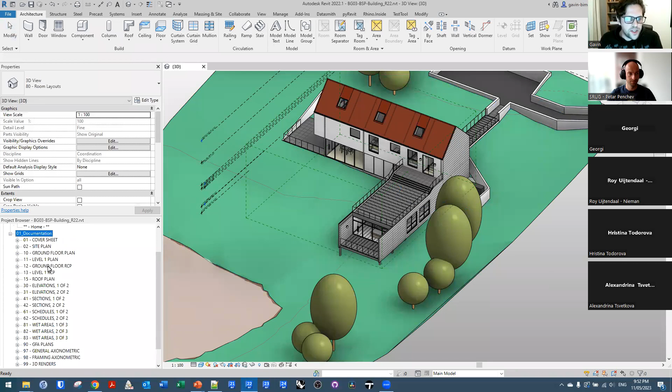So this is the model from my website. So if you want one, this is it. It's got documentation in it. It's got drawings, and it's not like the Autodesk model. It's a little bit neater. It's got some room layout sheets, and it's a bit nicer than the standard one, and it works in Enscape.

But anyway, so I'm going to open up just a Dynamo script that I've built earlier, and it's made to automate placing revisions on sheets. So if people might recognize this workflow.

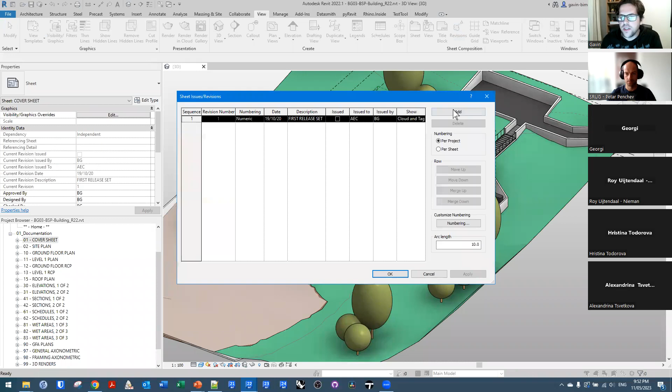Let's say you have a new revision you create. We're sending out a drawing set. We call it whatever we call it. I'm going to revision them. I'm going to go down, pick the revision, add the revision, pick the revision, add the revision. And I'm sure all of us have done that in Revit at some point.

It's really boring. It's a big waste of time. And back in the day, I used to do that for hundreds of sheets at a time. And it would take a good hour to get a sheet set ready to print. This is like 12 years ago, when Dynamo wasn't even really a thing that was available to us.

Let's automate that, because that's really boring. So this is a script that can automate that process. Now, Dynamo can be complex when you build scripts to be user-friendly.

This whole part of the script is just to build a user interface to take some inputs from the model that the user can pick from. This is using a custom package called Data Shapes, which enables you to create a form using various inputs, such as a dropdown for picking a revision, a list view for picking a set of sheets, and a combo button, or choose-an-option button, which lets us either add or remove.

Finally, we take our inputs and use them to process whether we're adding or removing revisions. It's important to note these are custom nodes. You'll notice this script is mostly using custom nodes, because at a certain point in Dynamo, you'll find there are things you need Dynamo to do that by default, it doesn't come with the possibility to do unless you actually write your own code in Python or C#.

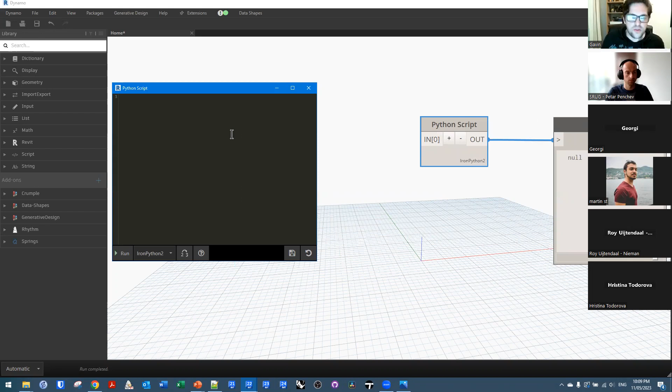We can use variables. So I can make a string, which I declare using the equals sign, and I can say string. Currently, nothing will happen in Dynamo. We have to actually send our result out to the out variable. This is quite unique to Dynamo. And I can see now I'm sending out string, and of course it's going to have a data type associated to it.

So I can check the type of it, and it's going to be, in this case, a string. I can also do numbers. So let's do an integer, being something without what we call a floating point. And we can also do a float, which in this case will have a floating point.

We can also do lists. So I can write a list. If you've ever used code blocks in Dynamo, it's the same thing. But what I can do is reference my variables and pass them forward and use them again. And then I can send out my list, and we'll see that we can store a mixture of data types through Python in a list object, which we use quite a lot.

We'll use a special type of object now. This is a range. So there are lots of constructors in Python that you learn over time. Let's make a range object, which in this case takes a few arguments, say like 1 to 5 with a step of 1. And then we'll just send that out. I can see now I've got 1, 2, 3, 4. It ignores the last integer. That's something you learn as well. Lots of things to learn in programming, just like lists start at 0 and all those sorts of things that don't make sense at first, but the more you think about them, the more sense they make.

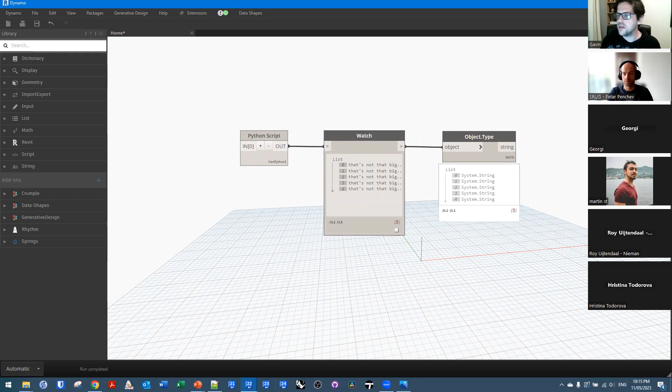I don't want to spend too long on this, but I think in this case, I must have missed one thing. Generally, there would be a way to get to a point where you catch that final outcome. I won't spend too long on it because I went way outside my example that I wrote down. So I don't have a little cheat sheet for this part, unfortunately. That's just an example of working with some statements and variables in Python. We haven't used the Revit API at all there, but we will use a little bit in pyRevit.

So let's actually get to what we're here for, pyRevit. But I wanted to lay down all those steps to get to pyRevit because that's really the process most people take to reach this point. So pyRevit, Python for Revit, it's an add-in for Revit, which allows you to access the Revit API and run Python scripts that communicate through the Revit Python shell. You can also run Dynamo scripts through it, which is quite interesting, but I generally just use Dynamo Player for those because it's still an easier method of deploying and setting inputs.

From here, you can also detect events in Revit, which is really cool. So you can run these things called hooks that trigger when certain things happen in Revit. For example, you can stop commands from happening. If someone tries to model in place, you can block it. You can say, no, we're not modeling in place today, sorry. Or you can silently just send an email to a BIM manager saying someone just tried to model in place, and you can actually start warning people when things are happening. So if anyone knows Guardian for Revit, an add-in, that's pretty much the way Guardian works. It uses events in the background, but you can do the same thing in pyRevit.

You can put it all into toolbars, which is probably the best part. Easy for users to access and see. There are heaps of tools that come with pyRevit, and one of the biggest mistakes people make with pyRevit is that they assume that's all pyRevit is, and it's like, no, this is just really the tip of the iceberg. You can build your own custom tools. Now, they're all really awesome tools, but the best part about them is they're written in a way where you can see how they were written by the author. It's all open, and you can learn from the way the author writes their tools as well.

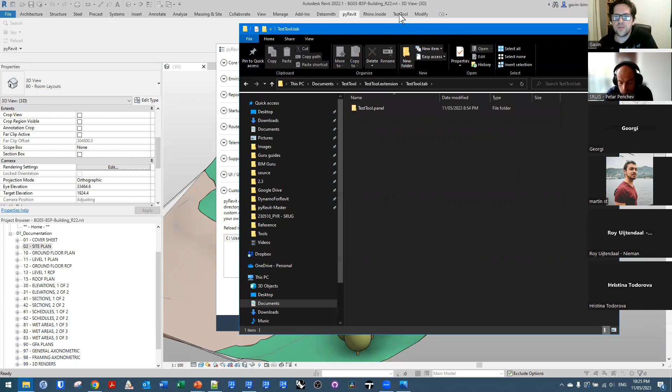And in pyRevit, under its settings, I'm currently hiding all the tools in pyRevit. I've added already a custom extension called test tool. So if I go to test tool, I can see it's just in my documents. It's got an extension folder, a tab, which is going to be test tool tab, test tool panel, which you can see is here. And then I have two buttons, currently with no icons.

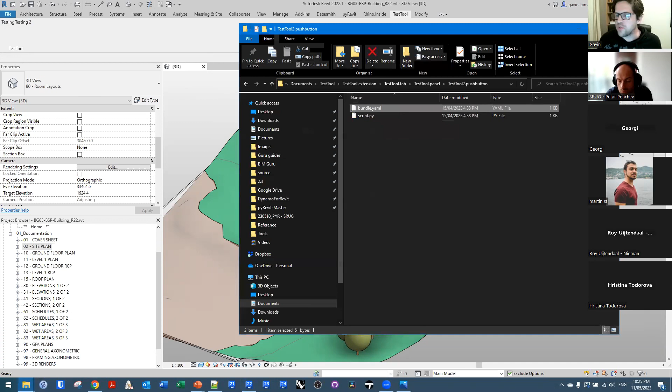And I'm just going to look at test tool 2. And we have two things. We have a bundle and we have a script. The bundle is using what's called a YAML file. It's not really a file I was familiar with before I used pyRevit. I'm not sure exactly what else YAML files are used for. I'm sure they have their use, but effectively they are just providing some settings that the script will use.

So this is why the tool is called testing 2. I've told it its title is testing 2, and I've said its tooltip is just testing. So I can hover over it and I get the properties of the YAML file. So this lets us sort of guide how our toolbar should look and display and behave. There are more complicated things we can do with it, such as changing the colors of buttons and also adding hyperlinks to help URLs that you can connect F1 help links to as well.

So we'll just leave the YAML file. Let's actually build a quick tool. So I've set up just some areas we're going to build our tool using. Most of the time when you use pyRevit, you're going to begin by importing some libraries from pyRevit. So I'm going to say from pyRevit, import Revit, which has some custom Revit commands, the Revit DB, which gives us access to the Revit API classes, script, which will allow us to stop our script, and forms.

Now, if you've never seen pyRevit, you're probably saying, how do you know those 4 things? Like, how do you even know that's how you begin a script? Well, you can look at the tools built by the author of pyRevit, but of course you can also go to the pyRevit docs. So I can look at the forms library or the script library or the Revit library. DB is a bit of a special one. It's a thing that pyRevit has built into it that basically just says, I want to talk to the Revit API.

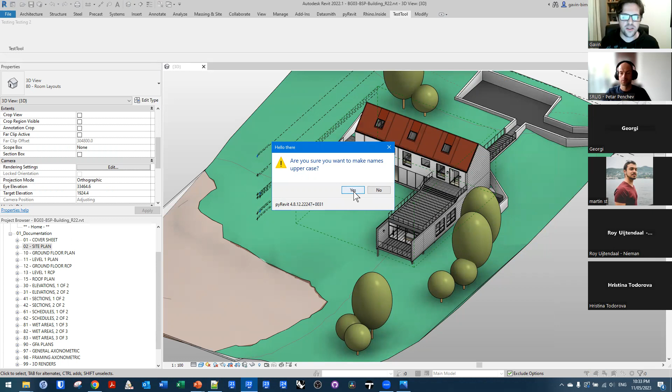If we say yes, it's going to pass the true variable to this object I've stored the form to. If not, it's going to store None, which is something that we can check for using an if statement. So I can say if not ask user, which means we rejected the form, I can just exit the script. And let's say after this point, I divide 5 by 0.

I say no, everything's fine because we didn't go past that point. So we didn't divide by 0, no error. Obviously, if we say yes, it's going to go past that point and we should get an error. And there it is, we can't divide by 0. So we can see we're able to actually control the behavior of our scripts at a particular point in the code, which is really powerful.

So creating exit conditions through code is actually really common once you start doing written code or creating alternate areas of an application to access under certain conditions. The final thing we'll do is actually create a function to actually make our sheets go upper. So we're going to make an upper name function applied to S. And maybe we'll just call this actually case change. And I'll say upper is equal to true by default. Otherwise, let's do lower.

So I'll just do a try and except just to be safe. So if something doesn't work in here, it just won't do anything. So I'll just try, in this case, to get the parameter, the sheet name in this case. So I'll do a longer method. If anyone's ever used the get parameter value by name, this is effectively what I'm going to be doing here using the Revit API. So I'm going to ask this sheet using the lookup parameter method for sheet name.

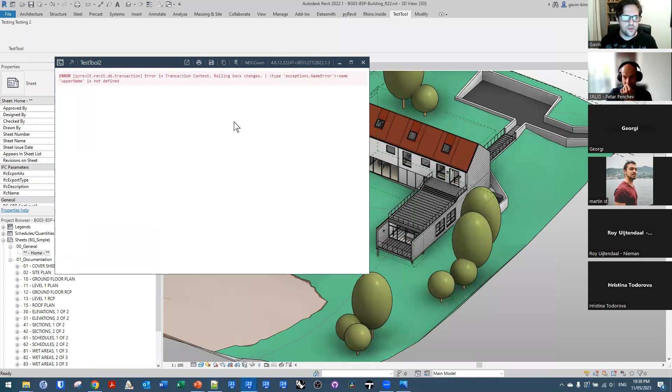I believe at this point this function should now work. You can see at the moment this home isn't uppercased. So if I run this function... are you sure you want to do it? Yes. Okay, of course, 'upper name is not defined.'

I think I need to actually use the right function name, which in this case is 'sheet change case.' Try again.

Of course, zero sheet names updated. Done something wrong here. Now I've just got to really quickly check what I've done wrong. The risk of live coding. There we go, hopefully it's just that typo. I left out a lowercase r. If not, I'll show you some working tools after.

Okay, so I'm going to sort of break a rule in programming here. I'm just going to stop using try and just see what's wrong. So I'm de-indenting in this case, and I'm just saying I assume everything in here is going to be valid. It should work, and this should actually tell me what's going wrong.

Change case is not defined, global name. So in this case, I'm still calling on case change or change case. I've called one 'case change' and one 'change case.' So it's just a variable naming issue, a very basic error, just to prove that all of us make mistakes.

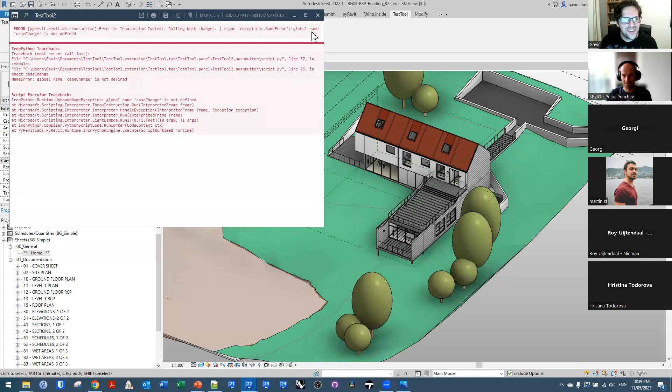I've still got one in there somewhere. Case change, change case. Someone can probably spot it at the moment. Yeah, there we go.

Okay, so now it should work. Fingers crossed. There we go, you see it worked, one sheet now updated. There we go, we got there.

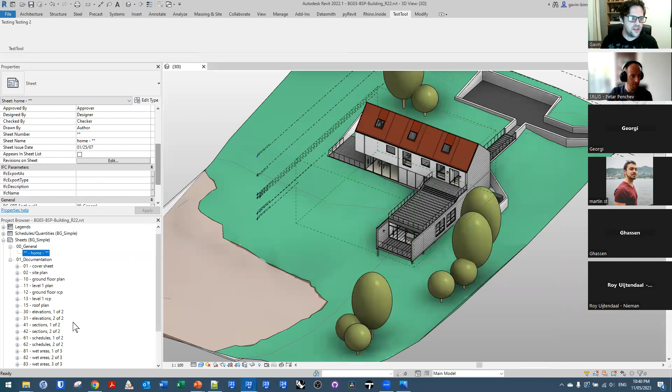We can very quickly just say, instead of that—and of course we could get the user to specify this argument—let's just say false, now we want to go to lowercase. And very quickly... whoops, that's the other one. I can run this in a different mode, and we can see that we're very quickly able to apply this in the other direction. So just a simple little tool.

I might actually show you some proper toolbars very quickly. I know we've sort of gone a little bit past the hour, but I might just show them quickly because I know that's always fun to see, and I do have permission to show these as well.

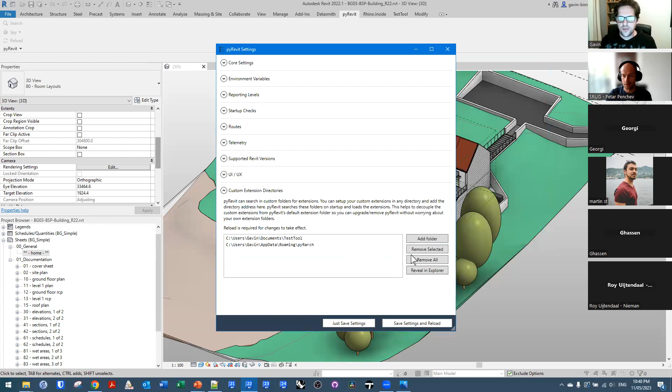So I'm going to add some more extensions here. The best place I find to store extensions is in app data, typically—it's a very accessible location. I'm just going to load up both pyRarch, which is the company toolbar that I use, and guRoo, which is my custom toolbar. So you can have multiple extensions available at once.

The more you have, obviously, the more time it's going to take to load. Some of them might start bumping into each other if they use hooks to detect the same things, so do be careful using multiple ones. Usually you need to know how they're behaving in order to use them together.

Here's the one that we use at Architectus. So buried in here are all sorts of cool tools. I can't show every single tool—some of them are very sensitive to the company—but generally there are some that I can show.

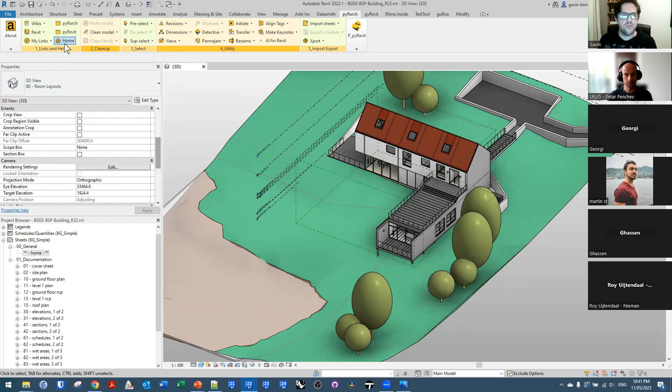For example, I built a home button for Revit that takes me home. Now, every tool I run in this toolbar is going to be just a little bit slower than usual because I have a function built into my toolbar that reports the script used to my server that we run at work, which actually gives me feedback on who's using the tools. So there's a little function that's basically hitting an error and proceeding on, causing a little lag on each tool.

Usually they're a little bit faster, but for example, we have wikis—we can access hyperlinks to websites. Most of these won't load because I'm not on the company server, of course, but they're shortcuts of people that we typically induct into the company.

I have tools such as a 'nuke' that basically goes and gets the model ready for an issue. It just tries to get rid of all the stuff we usually want to get rid of—hit the big red button, launch nuke, yes—and we just blow up the model and it's ready to go. So you can see I just automated a lot of stuff in one step there. Let's go back before the nuke.

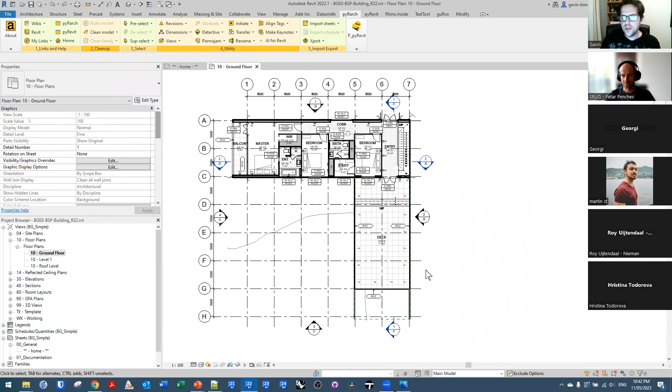As well as this, I have some really interesting tools that sort of break the rules of Revit. For example, I have a tool called pre-select. Let's say I want to get all the doors in this view. How would you usually do this? There's a few options - one is isolate category, get doors.

Another one, and a really bad way to do it, is to do a big giant marquee all over the model, filter, grab my stuff I need. Most people do that, right? That's pretty common - sweep over the model, grab the things, deselect.

If I use pre-select, I can say I only want to get particular things - maybe doors, walls, and windows. I can make a filtered selection using a special class in the Revit API that pyRevit has access to - in this case, an ISelectionFilter, if anyone knows it. I finish, and I've just formed a much faster, more efficient selection in my model.

I can do things like select title blocks on sheets. Let's say I want to get all the title blocks on these sheets. Usually I wouldn't be able to do that, but I can build a tool that goes to the sheets and selects all the title blocks. Now from those 20 sheets, I should gain access to their title blocks. There's actually 2 title blocks in one of those sheets - a custom title block. So you can see you can sort of bend the rules a little bit in Revit.

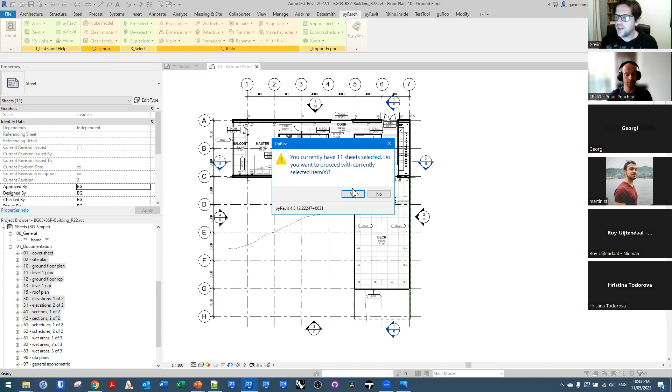But let's say we want to go and add revisions to those sheets. pyRevit actually has a function that says, oh, you have sheets selected - should I just use those instead? If not, it will let you pick. Otherwise, it will just run on the ones you have. Apply the revision - at the moment they all have revisions on them of that revision, so they don't need to be revisioned, so it skips them.

Let's down revision them - let's go the other way. Cool, and there we go. We took the revisions off.

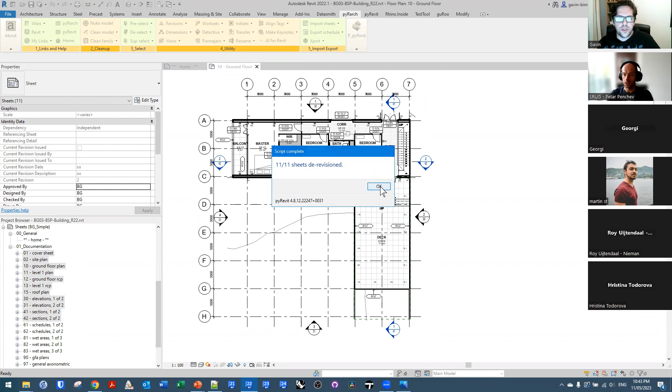Maybe we're going to print these sheets. Let's create a sheet set for the revision. Pick the revision - makes a sheet set.

Ready to print. So there's a lot of really custom tools you can make that sort of change the way Revit behaves a little bit - do things that you wish you could do in Revit just to make things that little bit more efficient. Most of these tools are focused on those sorts of things.

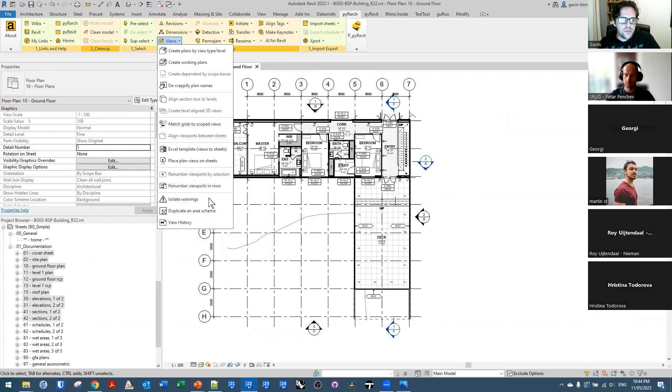There are some other things I can't really show, like we have a batch printing tool in here that's pretty powerful, similar to XREV if you've ever used it - well, we don't need it. We have view creation tools - for example, I can create plans by type and level, isolate warnings in view, so if I'm auditing my model...

And I'll show a couple of these behind the scenes maybe as well, just because these are all written in Python, obviously. And then we have my warning elements in my view.

Let's have a look at maybe one of these behind the scenes, such as the transfer wall type tool. If I make a new project, everyone probably knows transfer project standards. Well, don't you wish you could just transfer a couple of things and not all the things? Well, you can - you can copy the elements from a background document using Python.

So there we go, wall types. From my background document, I can just pick a few - I just want my cladding. Grab them all, copy them across. And I just got a few of them instead of all of them.

There they are. So this tool, if I go behind the scenes, is a pretty interesting one, and I'm pretty sure I'm allowed to show this - it's not too sensitive. I've used a shortcut there, Alt and left click, which takes you to the folder that the actual script is in.

Now this script is going to look very, very simple. Look at that - that's all it is. How simple is that? It imports a library, reports to the server that the tool has been run, and then uses a custom function. So it looks simple - let's go behind the scenes. What is copy utilities? Well, pyRevit actually lets you build your own libraries.

So we have copy utilities. Well, that looks a bit more complicated, doesn't it? In this case, the script that I was running uses copy by class, which is a function that I programmed. Now I'm not using classes in this library, which isn't always best practice. If anyone knows Python well, you know I'm not really following best practice in this particular library, so do forgive me, but here we go.

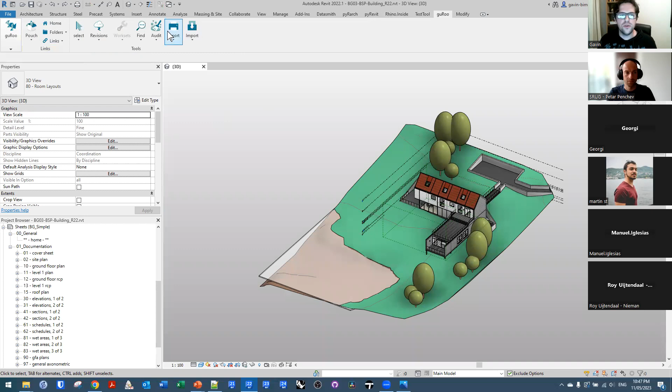If I go back to this model and run guRoo, export sheets to PDF - this is obviously only going to work in 2022 and beyond, when they added the exporter. And it'll go and start pumping out exported sheets with a predefined naming rule. And there they are, they start going.

You can see I'm using loading bars, which are a feature in pyRevit as well. You can put things into loading bars in order to make a more stable interface for the user. And it's automatically known by default to start printing to a particular folder, because I've written the tool to work that way. So rather than forcing the user to navigate to a directory and take minutes to do it, it just says, go to C drive, go to my documents, automatically build a path.

So that's just some examples of some tools I've built in pyRevit. But I guess the point I want to show is it really does free you up from being limited by the tools. As long as the API gives you access to something you want to automate, it's definitely possible. There are some more complicated tools I can't run through here, but they tie very closely to company process - things the company wants Revit to do to suit them, rather than doing things to suit Revit. So automating is usually a really good way to do that.

So I do encourage any company that's maybe over, say, 30 people - even if you're smaller than 30 people and you have the passion, do it. Explore automation. Start with Dynamo, build your way up to pyRevit, consider add-ins, consider Speckle - all sorts of ways to automate and streamline and interoperate.

So that's sort of just the end of a very quick and slightly eventful live demo. Didn't go too badly. So I guess I do like to remind people that pyRevit is technically free.

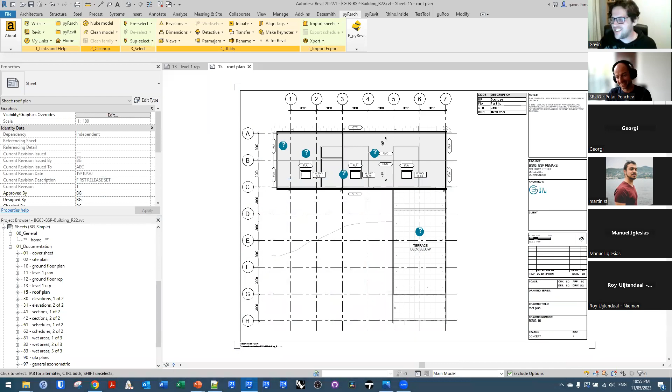So I think AI is very interesting, but I think it's a very new field, and people are trying to do too much with it too quickly. So it's a bit of a joke to my company saying Revit AI is not quite here yet. AI is an interesting topic. Yeah, I agree. I think you said that, Petar, didn't you? Yeah, definitely an interesting field. Lots of cool things going on. If anyone's looking for an example, maybe look into Veras by Evolve Lab. It's an image generation app from Revit using stable diffusion as the algorithm that creates the images.

Can you change IronPython to CPython for pyRevit? Yes. I think Sylvia asked that. I believe I should be able to find a very quick example. Just stop me if I'm talking too much, Petar. I'm just breezing through the questions one by one. No, it's really helpful. So CPython 3 in pyRevit. This is how I solve 90% of my programming problems. Usually there's someone that's made a thread out there for it or a question about it. Usually you have to specify it in the header of your code. There you go. That's how you go to Python 3.

So you put that at the very top of your Python script, and at that point, you're instead using Python 3 as your interpreter, which gives you access to pandas, NumPy, SciPy, scikit-learn, all sorts of libraries that Python 2 doesn't have the ability to access, which is pretty big, especially if you're doing machine learning, which might be why the question was there.